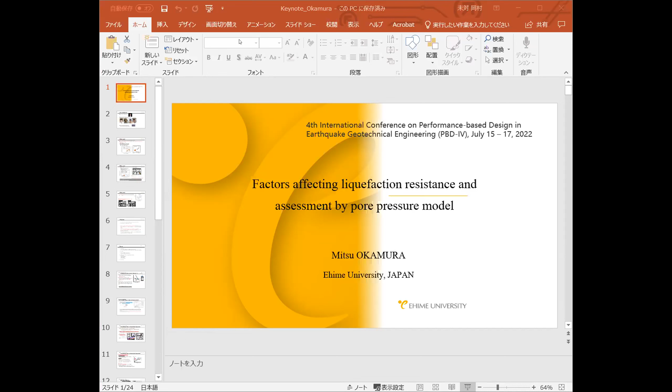The title of my presentation is The Factor Affecting Liquefaction Resistance and the Assessment by the Pore Pressure Model. I'd like to express my special thanks to a colleague and former student in the Geotechnical Laboratory of Ehime University. The work presented here was financially supported by JSPS Kakenhi.

I'd like to spend some time explaining the background of this work. The resistance of sand to liquefaction has been investigated over several decades. Significant progress has been made in understanding the fundamental mechanism and influence of various factors on liquefaction resistance. However, assessment of liquefaction resistance on clean sand still involves considerable uncertainties, even in laboratory studies, and the effects of influential factors are still current topics of soil liquefaction study.

With regard to the effect of shaking history, for example, it has been recognized that cyclic weak shaking in drained condition enhances the liquefaction resistance of sand. This shows the liquefaction resistance RL of sand subjected to pre-shearing. The drained pre-shearing of up to 10,000 cycles almost tripled the liquefaction resistance, as shown here. The results of similar tests in the literature consistently indicate that liquefaction resistance increased with number of cycles, as indicated here, and with the cyclic stress ratio of pre-shearing.

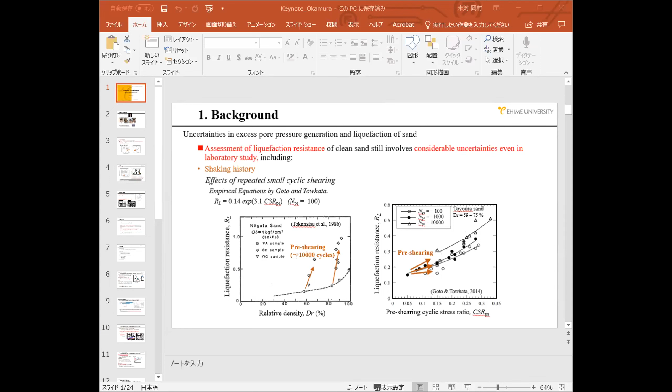Some empirical relationships have been proposed, but none of the testing parameters alone quantified the increase in liquefaction resistance.

The loading history, such as over-consolidation, also has a substantial effect on liquefaction resistance. Empirical equations for liquefaction resistance were proposed as power functions of OCR, though the data points scatter considerably, as shown here. The right-hand side here shows...

...the saturation degree. This saturation degree also has substantial effects on liquefaction resistance. This topic attracts engineers' attention in recent years, since in-situ desaturation can be an inexpensive alternative liquefaction countermeasure.

Laboratory test results by many researchers were expressed in the relationship between degree of saturation and liquefaction resistance increment ratio. However, the data points scatter significantly, indicating that degree of saturation is not the only parameter affecting the liquefaction resistance ratio. This is also the case for pre-shearing and over-consolidation effects.

Empirical formulas have been proposed for each effect, but none of them are sufficient to explain the overall picture of sand resistance to liquefaction.

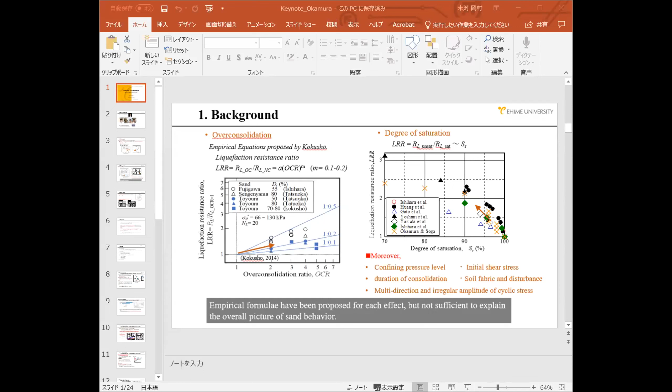The basic mechanism of densification of sand and pore pressure generation in undrained cyclic shearing was conceptually demonstrated by Martin et al., 1975. The excess pore pressure generation, delta U, was clearly correlated with volumetric strain, epsilon Vp.

Recently, attempts were made to explain the effect of factors using a unified single parameter of volumetric strain. For unsaturated sand, the volumetric strain owing to the increase in excess pore pressure has been found to be a dominant factor in liquefaction resistance.

The liquefaction resistance ratio is uniquely correlated with volumetric strain during undrained cyclic shearing. Regarding the pre-shearing effect, the volumetric strain accumulated by pre-shearing is also a factor that can explain the enhancement of liquefaction resistance.

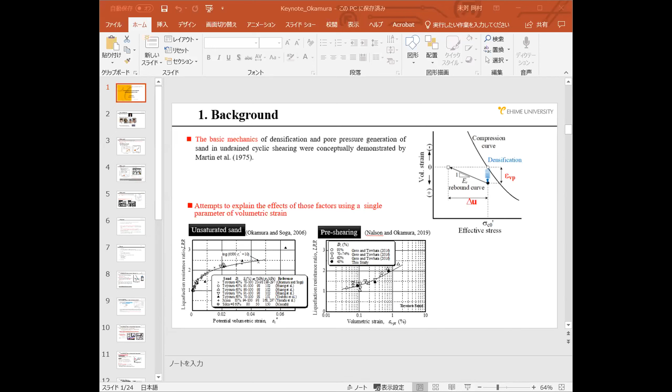It may be valuable to go back to the basic mechanism of pore pressure generation and reconsider the effect from the fundamental principle. To do that, in this study the pore pressure generation model is reconstructed, based on the fundamental principle demonstrated by Martin et al. Using the model, triaxial tests are analyzed to better understand the physical process of excess pore pressure generation that leads to liquefaction of saturated and unsaturated sand with and without stress histories.

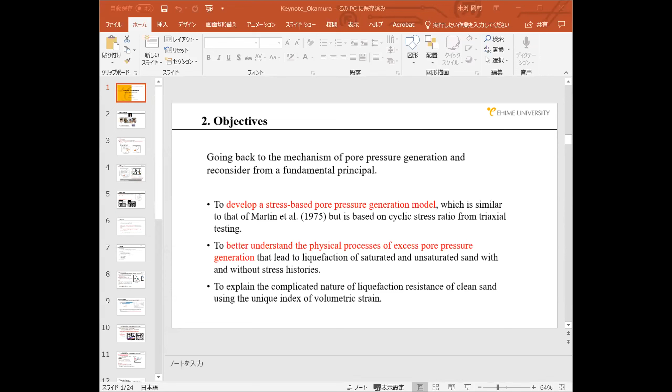Finally, an attempt is made to explain the complicated nature of liquefaction resistance of clean sand using the unified index of volumetric strain from the model. This is the content of this presentation. The background and objective of this study were already described. Next, the pore pressure generation model is briefly explained, and the effects of the factors on liquefaction resistance are discussed.

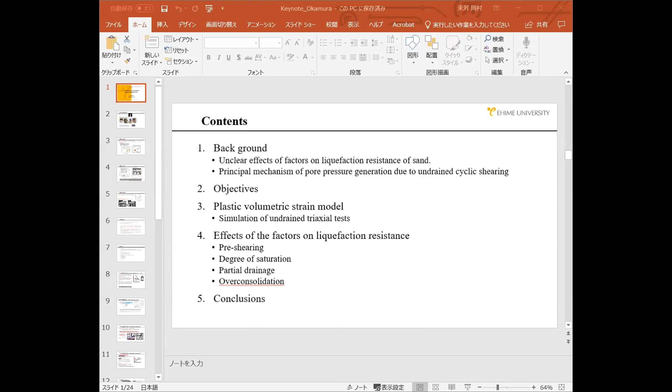The principal model.

When the sand is subjected to drained cyclic shearing, slippage at the soil grain contacts occurs, resulting in densification and plastic volumetric strain epsilon V, as shown by epsilon Vp.

When the undrained condition is imposed, epsilon Vp has to be compensated by the same amount of negative volumetric strain. The soil skeleton rebounds elastically to the extent required to keep the volumetric volume constant along the rebound line, like this.

With the bulk modulus of water Kw being sufficiently high to ignore the volumetric change of water, the change in pore pressure can be simply expressed as a product of elastic rebound modulus ER and plastic volumetric strain, like this.

The only two variables, epsilon Vp and ER, define pore pressure generation. This relationship should hold true for any saturated granular material.

Martin et al. recognized the usefulness of this intrinsic relationship. They formulated volumetric strain epsilon Vp based on drained cyclic simple shear tests with constant shear strain amplitude, as indicated by this equation. The delta epsilon Vp is the increase in plastic strain in cyclic drained shearing with shear strain amplitude of gamma.

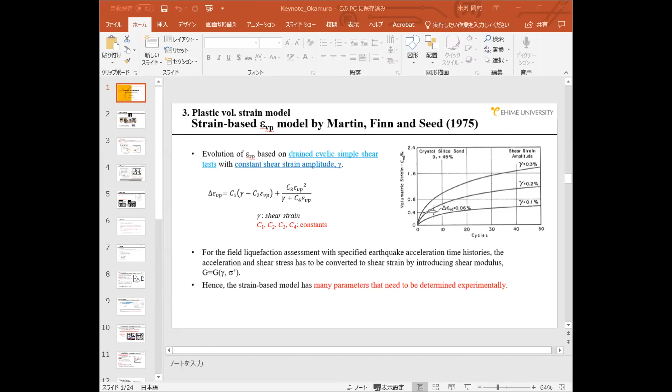The stress-based model: although shear strain is more clearly correlated with plastic volumetric strain than is shear stress, a stress-based model has a clear advantage over the strain-based model. In liquefaction triggering assessment, acceleration and thus shear stresses are directly used to obtain volumetric strain in the stress-based model.

In this study, a stress-based model is formulated based on triaxial testing. The sand used for all the tests conducted in this study, and quoted from the literature, was medium dense Toyoura sand in a range of relative density of 45 to 51%, confined isotropically at effective stresses of either 50 kilopascal or 100 kilopascal.

This shows the evolution of the volumetric strain with the number of uniform cycles of CSR in drained triaxial test. The epsilon Vp increased with the number of cycles, with epsilon Vp being higher for higher cyclic stress ratio.

All the curves are geometrically similar and well approximated with an exponential function of the number of cycles and CSR, like this. A set of parameters, A, B, C, and D, completely defines the volumetric change behavior under drained cyclic shearing of constant CSR.

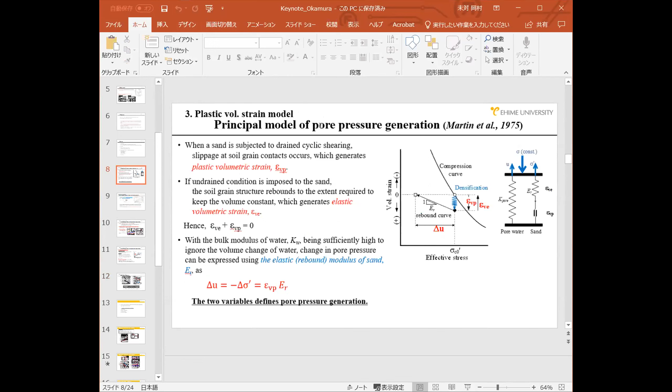Wait, the bottom right button next to the little book. Bottom right? Next to the Zoom, to the left of the Zoom.

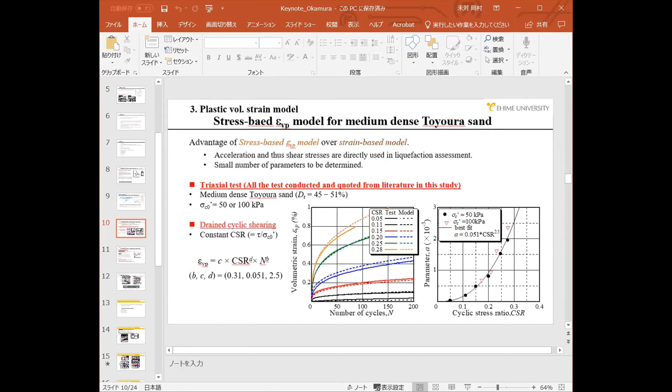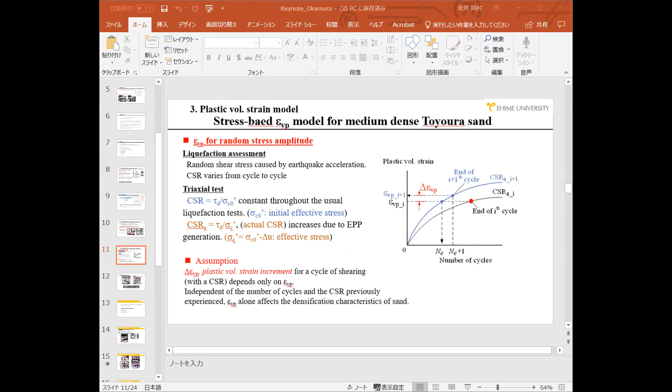Slideshow, you use the slideshow, Professor Okamura. Yes, I know what you mean, but try F5. F5 will do, it doesn't work. Press F5, yes. It doesn't work, maybe sometimes the... Thank you, Marty. Sorry for the inconvenience.

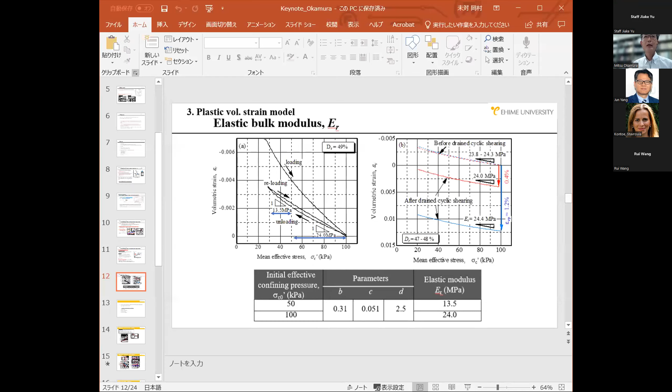Wait. Yeah, that's the one. No, I can't. So can I continue? Yeah, I think we'll have to continue then. Sorry, it's still visible. Yeah, it doesn't matter. Sorry for the inconvenience.

Yes, the next is elastic bulk modulus. The elastic rebound modulus of sand, ER, was observed in triaxial testing. The specimens were isotropically consolidated to 100 kilopascal, followed by unloading to 20 kilopascal and reloading back to 100 kilopascal again, before and after the drained cyclic shearing.

Although the rebound curve was non-linear, a linear approximation was applied just for simplicity in this study. The curve was reasonably approximated by lines with ER of 24 megapascal and 13.5 megapascal for the range of 100 to 50 and 50 to 25 kilopascal respectively.

The right-hand side also shows unloading curves of the two specimens before and after the drained cyclic shearing. Before drained cyclic shearing, the ER was in the range of about 24 megapascal. One specimen was subject to cyclic shearing and caused 0.4% pre-shaking volumetric strain. Another specimen was subjected to more cyclic shearing in drained condition and caused 1.2% of the epsilon VP.

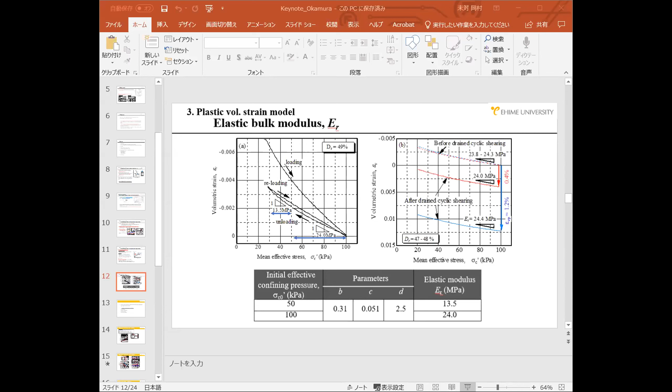From now on, I will present the comparisons between triaxial test observation and simulations using the pore pressure model. First of all, the normally consolidated, fully saturated sand without pre-shaking history.

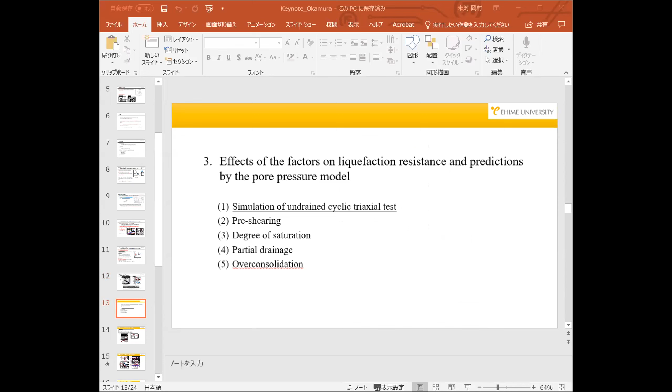This shows the typical result of the observed excess pore pressure ratio, RU, during cyclic shearing. The tested specimens were fully saturated, medium dense sand, normally consolidated at 50 kilopascal, and subjected to undrained cyclic shearing with constant CSR amplitude. This is an ordinary liquefaction test.

The excess pore pressure increment for a single cycle was largest at the first cycle, and slowed down gradually with the number of cycles. The RU increased sharply after it reached approximately 0.6 and finally jumped up to 1.0.

The simulated RU using the pore pressure model is shown in red dots. The overall trend of RU evolution for the test observation and the pore pressure model prediction agreed quite well. The rapid increase in excess pore pressure after RU exceeded 0.6 is also evident for the model prediction.

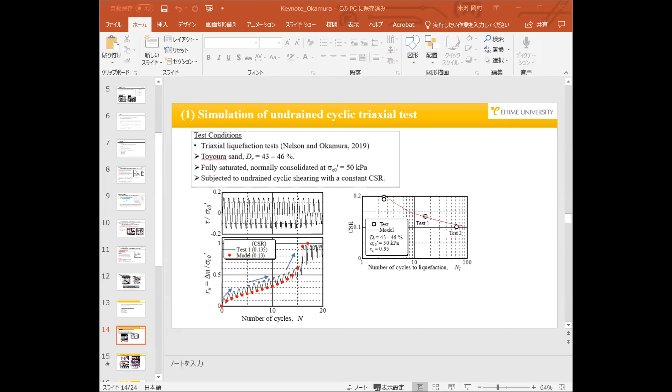This shows the relationship between cyclic stress ratio and the number of cycles needed to liquefy, obtained from the test. The red line shows the model. The pore pressure model predicted the liquefaction resistance satisfactorily well.

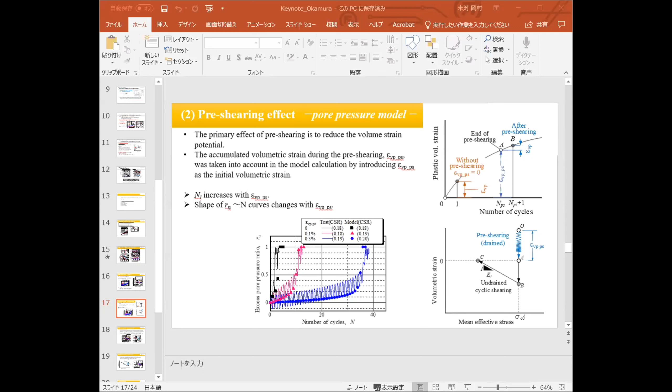This shows the liquefaction resistance curve, both observed in the test and predicted by the pore pressure model. The model successfully predicted the liquefaction curves for the sand.

It should be noted that the line for Epsilon Vp of 0.1% in this figure, here in the red line, coincides with those for Epsilon Vp of 0.1% for virgin sand, as already shown in the last section, indicated by the green line.

It can be concluded that the plastic volumetric strain that the sand accumulates during undrained cyclic shearing has the same effect as that gained by the pre-shearing on reducing the potential for further densification and pore pressure generation.

The effect of the degree of saturation is the next topic. The unsaturated sand can change its volume even if an undrained condition is imposed.

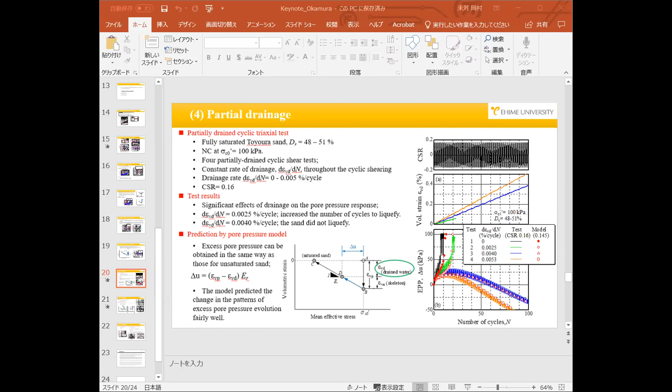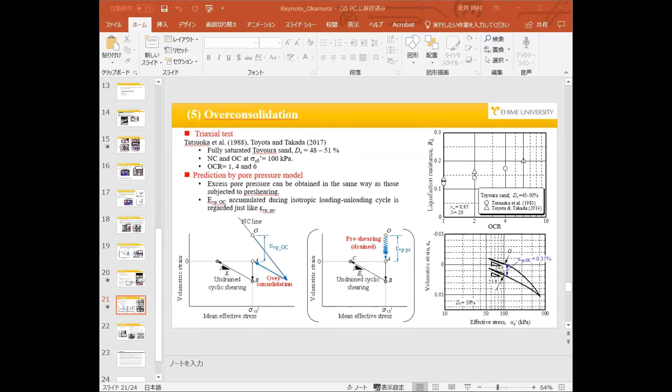The specimen was subjected to drained cyclic shearing with a cyclic stress ratio of 0.18. The volumetric strain of overconsolidated sand is smaller than that for normally consolidated sand. However, the observed epsilon VP for OCR4 is larger than that for virgin sand with pre-shearing volumetric strain of 0.35%.

It is expected that the red line, shifted vertically by 0.35%, should have fallen on the virgin sand line, as indicated by the blue line here. This discrepancy indicates that the plastic volumetric strain accumulated during the overconsolidation process and that accumulated during cyclic shearing have different effects on the densification of the sand in subsequent cyclic shearing.

This might indicate that the plastic volumetric strain induced by cyclic shearing is caused predominantly by sliding at the sand particle contacts. In contrast, the sand carries normal stresses at the summit of the highest asperity of the particle surface, and as consolidation pressure increases, a significant number of contact asperities may crush and deform plastically. The area of contact increases, resulting in densification of the sand.

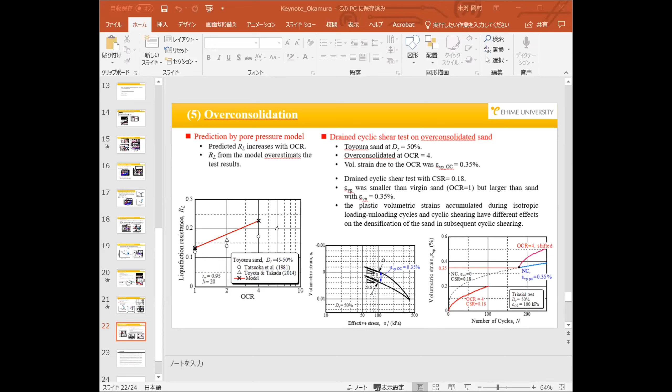This plastic volumetric strain, however, does not significantly reduce the potential for volumetric strain in subsequent cyclic shearing.

In conclusion, this study developed a pore pressure model based on stress-controlled triaxial tests at a constant shear strain amplitude. The model follows the basic assumption in Martin et al., that a unique relationship exists between the volumetric strain in drained tests and excess pore pressure in undrained tests.

The plastic volumetric strain developed during undrained cyclic shearing is absorbed by elastic rebound in the soil skeleton due to the reduction in effective stress, preserving the condition of constant volume.

The plastic volumetric strain in drained tests was modeled based on the constant CSR triaxial tests in this study. This cyclic stress-based model has an apparent advantage over the shear strain-based model of Martin et al., in that for assessing liquefaction triggering conditions, acceleration and thus shear stress is directly used to obtain the volumetric strain in the stress-based model, while strain must be converted into stress using shear modulus in the strain-based model. The effects of various factors on pore pressure generation and liquefaction resistance of clean sand were explained using a unique index, volumetric strain, through triaxial tests and simulations using the proposed model.

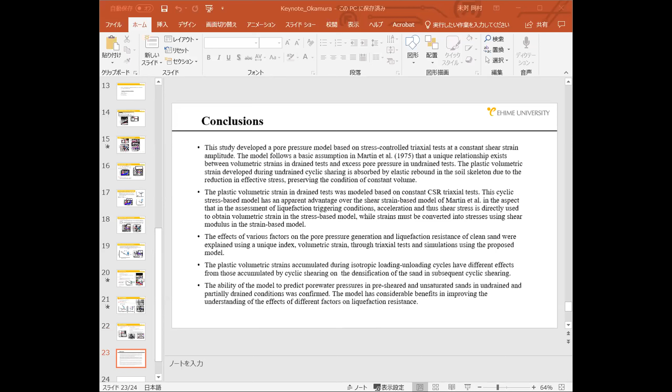That's it for my presentation, and thank you very much for your very kind attention.

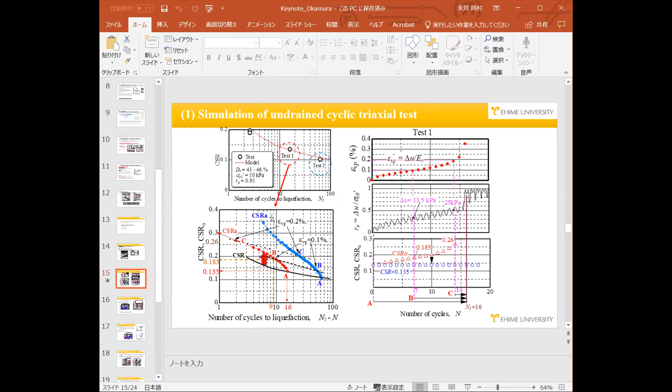Regarding the pre-shearing effect, the volumetric strain due to pre-shearing is only about 0.1, 0.3, or 0.8%, corresponding to a change in relative density of sand of up to only 3%. A 3% change in relative density of medium dense sand, say from 50% to 53%, is maybe negligible. So pre-shearing, the volumetric strain, has totally different effects on the liquefaction resistance. This is the point.

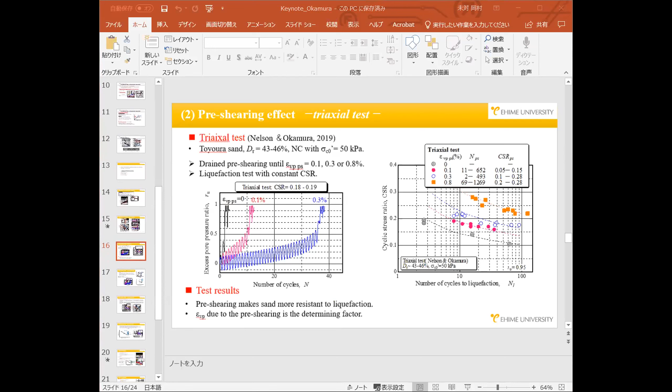So you measured the volume change under the undrained condition. Can you elaborate a little bit more on how you can accurately measure the volume change under the undrained condition for a partially saturated specimen?

The change in volume in the triaxial testing can be measured using the double cell system. The change in water level of the confining pressure cell in the very small cell can be measured, confirming that the change in volume of the air included in the specimen follows almost exactly the Boyle-Charles law. After confirming this through experiment, we can easily assess the change in volume of unsaturated sand using only the excess pore pressure. As the excess pore water pressure increases, the air bubble in the sand shrinks or reduces in volume according to the Boyle-Charles law.

Okay, so your system is a double cell system. Yes, right. Okay, thank you. And not only myself, but other research groups in Japan confirmed this conclusion. Yes. Okay, thank you.